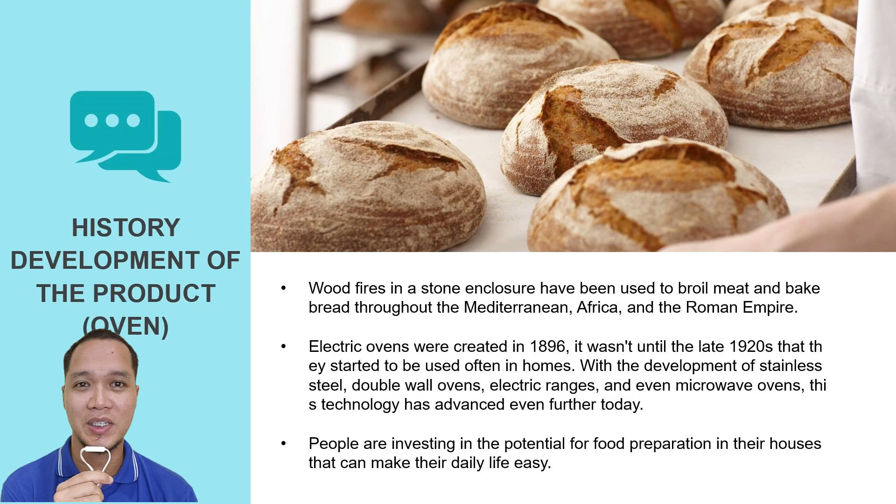Next, in the manufacturing process, there are three methods of production that we need to know: job shop, batch production, and mass production. Ovens are categorized as mass production due to the high demand, with production quantity exceeding 1 million units each year.

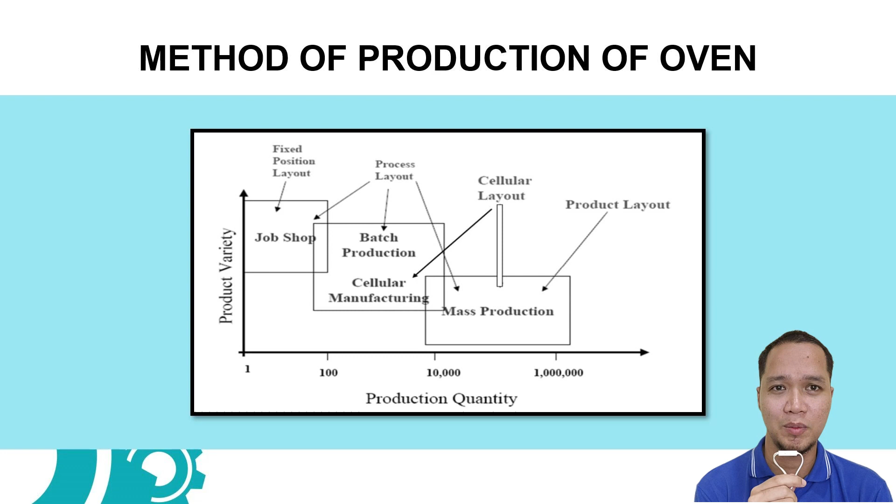In Malaysia alone, as many as 32.7 million people, and about half of the 8.2 million households on average, must have an oven. The picture shown is a component found in the oven.

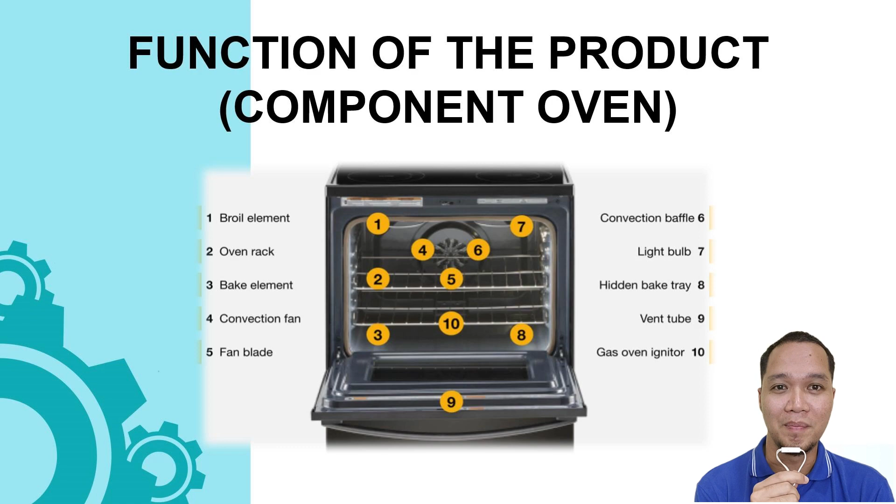Each component has its own function. We can see in this picture there is a broil element, oven rack, bake element, convection fan, fan blade, convection baffle, light bulb, hidden bake tray, vent tube, and gas oven igniter.

For the assumption on the type of manufacturing system related to this oven, we use the cellular layout method for some components such as electronic goods, sensors, and the like, as well as product layout for other components, installing part by part to make a perfect oven.

Estimates also need to be taken into account for each product quantity, and estimated cost that will be produced for a product from the beginning to the market.

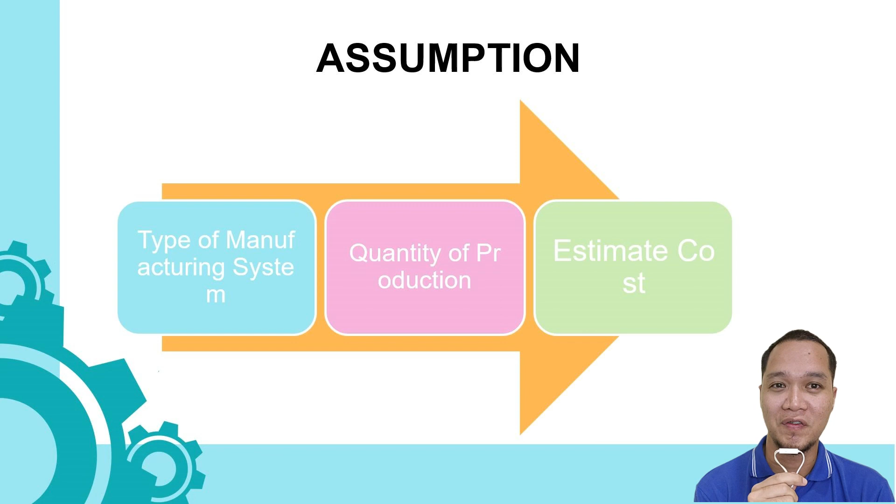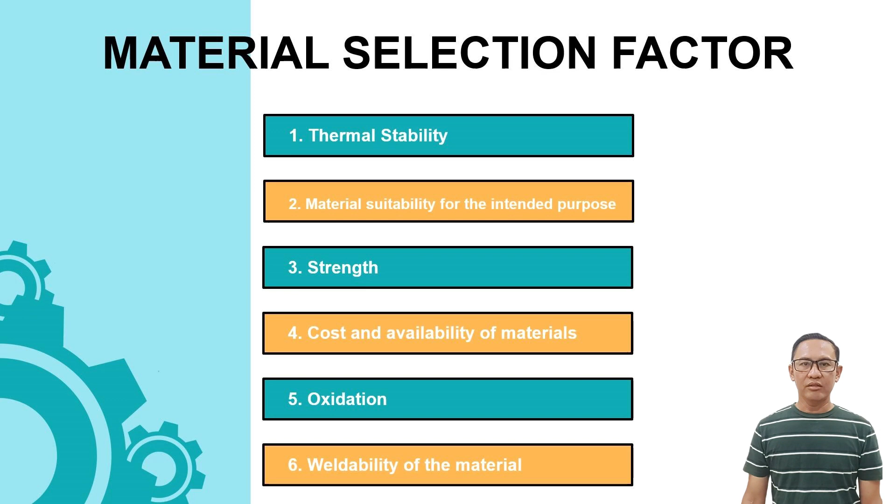Material used in the fabrication of this product is based on several factors of material selection, with criteria including operating temperature. Temperature is often the first, and sometimes the only, data point given upon which one is supposed to base material selection. However, one could not successfully choose material based on temperature alone. Other factors include thermal stability, material suitability for the intended purpose, strength, cost, availability of material, oxidation, and weldability of the material. The selected material and its respective properties are below.

Mild steel: this is an alloy of carbon with carbon content ranging from 0.1% to 0.3%, used for the oven body framework. The enclosure, used for supporting the wire mesh, is also made of mild steel material.

Physical property: mild steel is a good conductor of heat and has a high melting point, around 1650 degrees Celsius. The maximum operating temperature for the oven is around 300 to 350 degrees Celsius, which is far below the melting point of mild steel.

It has a density of 7,900 kg per cubic meter, and due to its lightweight, it can be carried from one place to another when needed. It has a low specific heat capacity, so the material's expansion with respect to increasing temperature is very small.

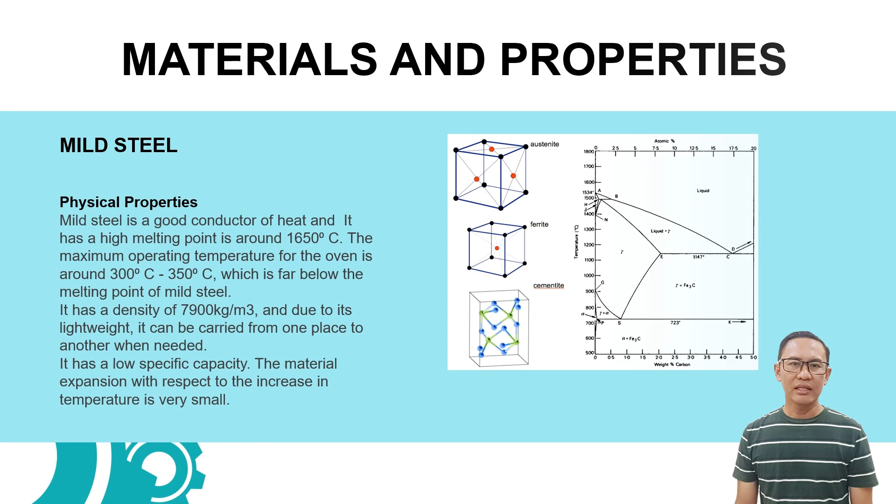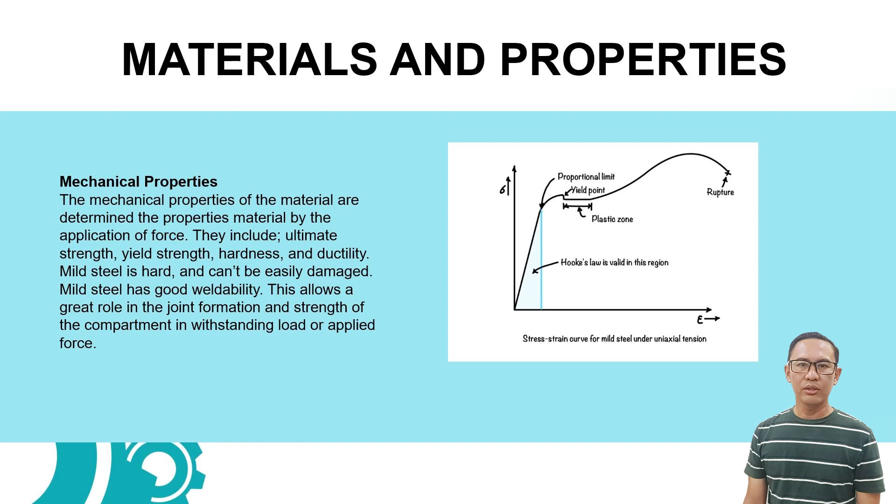Next, mechanical property. The mechanical property for the material is to determine the property of material by the application of force. They include ultimate strength, yield, hardness, and ductility. Mild steel is hard and cannot be easily damaged. Mild steel has good weldability. This allows a great role in the joint formation, and strength of the compartment is to withstand load or applied force.

Okay, I'm Shahira, so I will present the stage of process. For manufacturing system, there is input, process, and output. Process of transformation in manufacturing is one of the most important parts, where this part consists of three elements, which is process, design, and production.

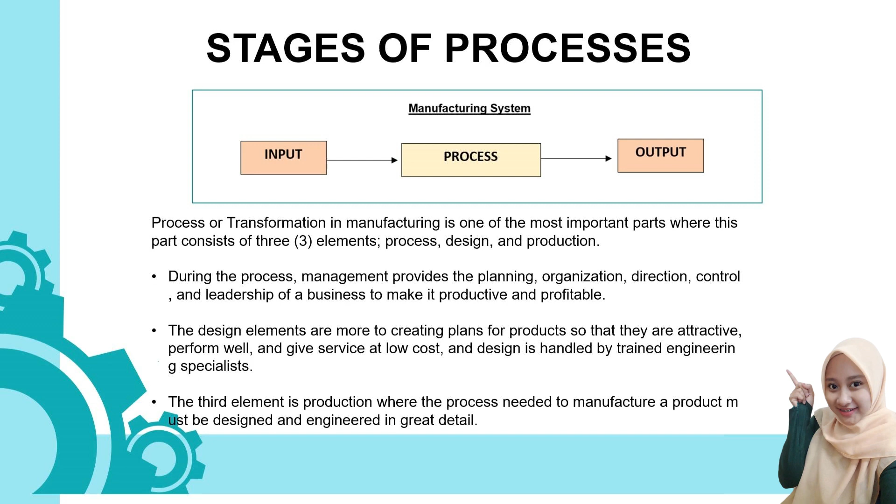During process, management provides the planning, organization, direction, control, and leadership of business to make it productive and profitable. The design element is more to create a plan for the product so that they are attractive, perform well, and give service at low cost, and design is handled by trained engineering specialists. The last element is production, where the process needed to manufacture a product must be designed and engineered in great detail.

Next is method of production comparison. The methods of production are normally known as job production, mass production, and batch production. In the process of producing the product, some research has been made so that manufacturers can produce a quality, low cost, but more profitable product with the implementation of a suitable type of process. So the main features are job, batch, and mass production.

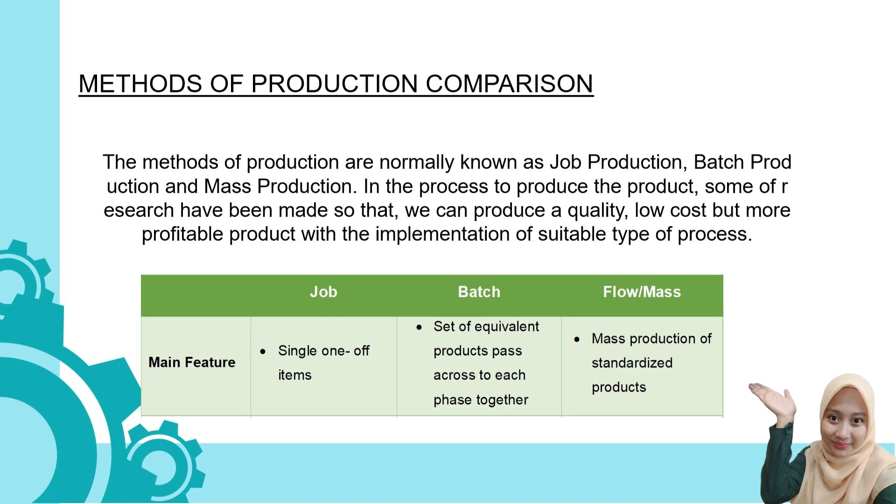The essential requirement for job production is a highly skilled workforce. For batch production, workers and machines should be adjustable to shift to making batches of other products. The last one is mass production, which requires expertise often with high price capital instruments but can be very effective, with high steady demand for standardized products.

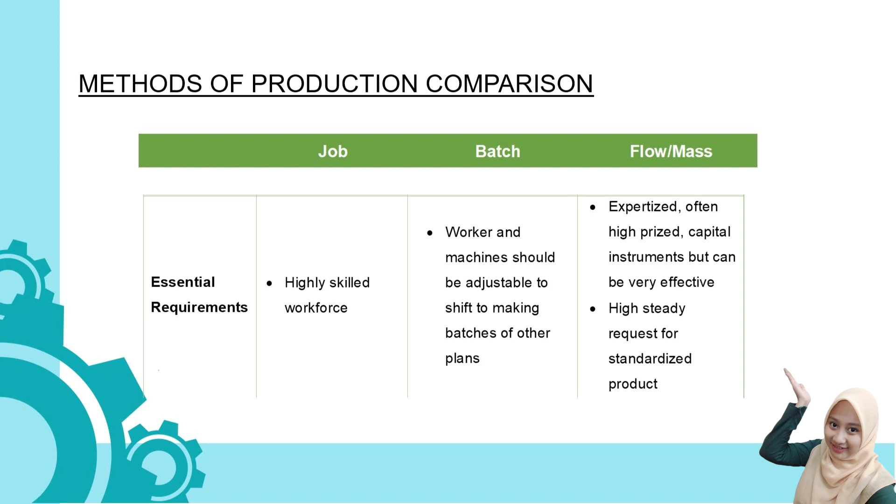The main advantage of job production is it allows acceptance of specialist jobs often with high added value and high level of worker motivation. For batch production, some economies of scale, faster production with lower unit cost than job production, and some flexibility in design of product in each batch. The last one is mass production: low unit cost due to constant working of machines, high labor productivity, and economies of scale.

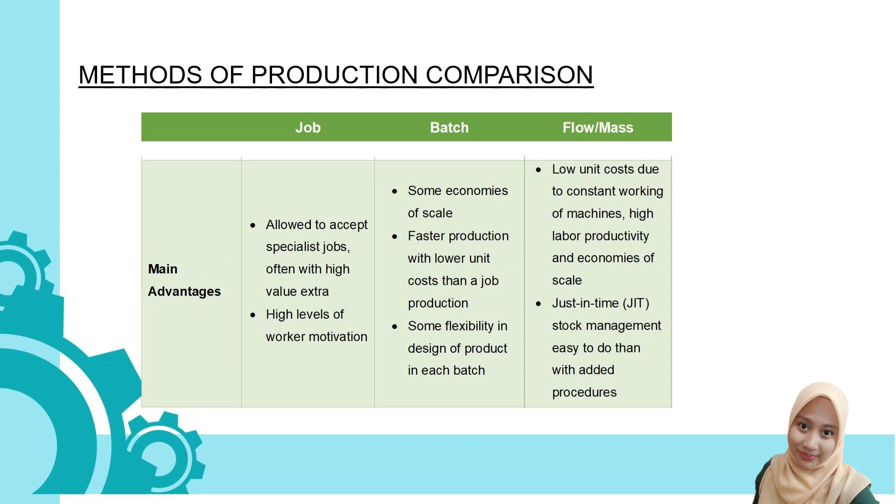The main limitation for job production is high unit production cost, time consuming, and a wide range of tools and equipment needed. For batch production, high ranking of stock at all production phases, and unit cost probably above flow production. The last one, mass production, is unadaptable and very hard and time consuming to change from one type of product to another, expensive to set up flow line machinery, and each section needs to be balanced.

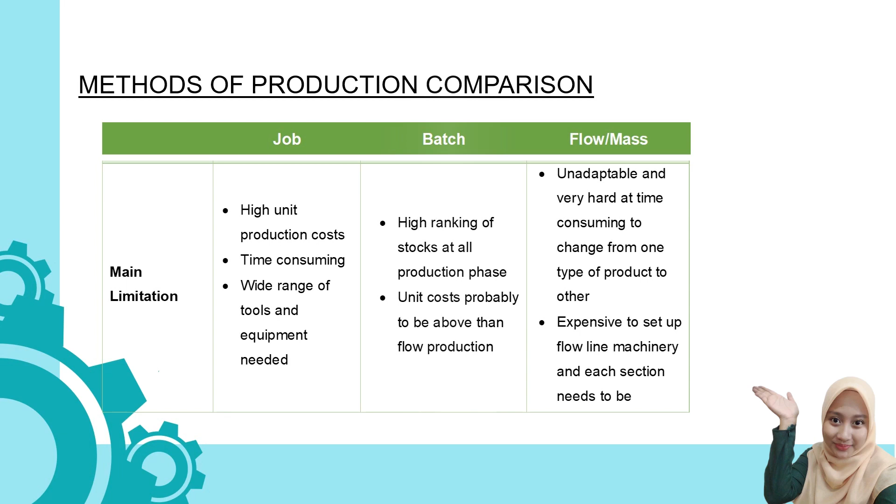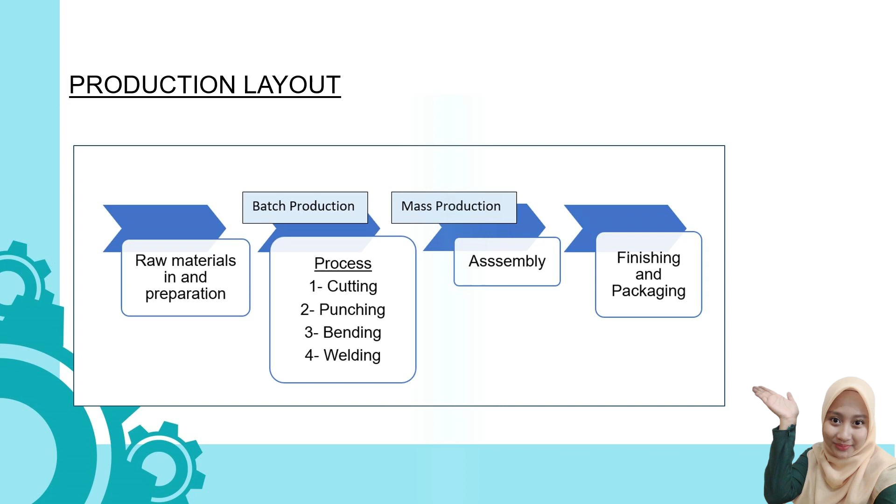So this is the layout for the production. The first is raw material preparation. The second is batch production, which is the process of cutting, punching, bending, and welding. The next step is mass production, which is assembly. The last one is finishing and packaging. So this is the type of process for product manufacture, which is batch production and mass production.

So what is the difference between them? In batch production, the product is made in batches, with every item in the batch going through the series of steps at the same time and in the same order until the entire batch is complete. For mass production, it's the manufacturing of large quantities of standardized products, often using assembly lines or automation technology. Mass production facilitates efficient production of a large number of similar products.

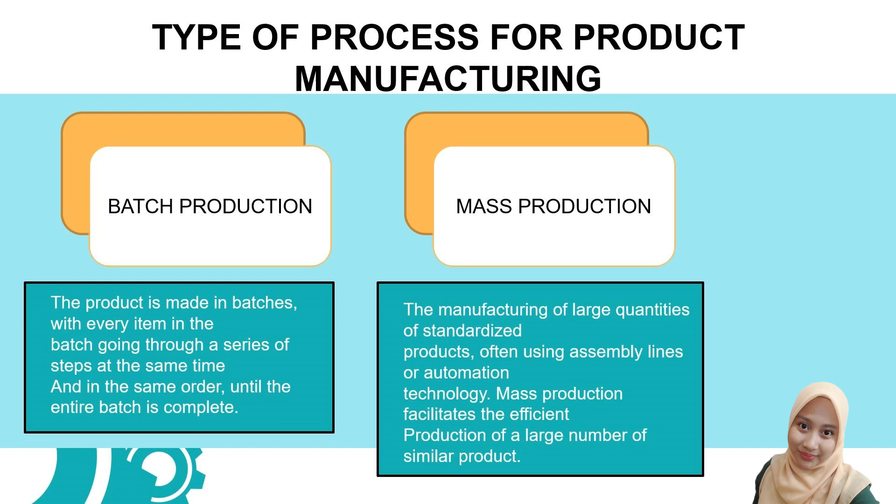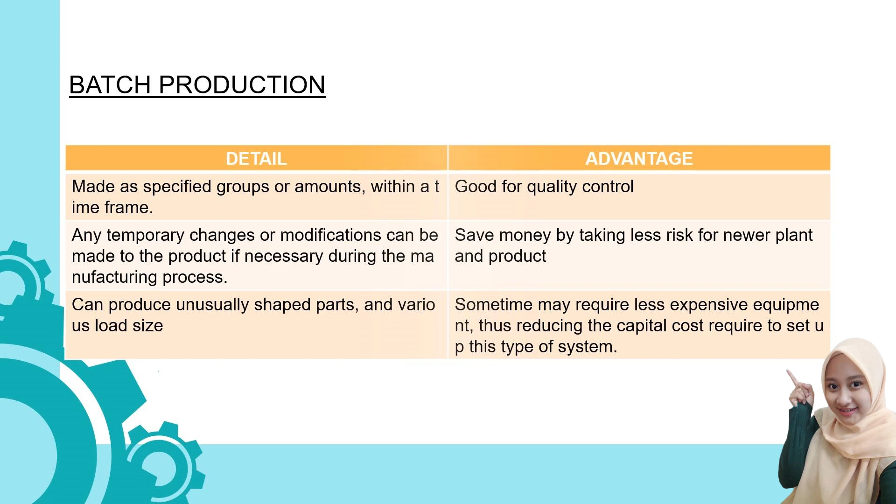So the detail for batch production: it's made as a specified group or amount within a time frame. Any temporary change or modification can be made to the product if necessary during the manufacturing process. It can produce unusually shaped parts and various load sizes. The advantage is good quality control, saves money by taking less risk for newer plant and product, and sometimes may require less expensive equipment, thus reducing the capital cost required to set up this type of system.

The last one is mass production. The detail of mass production is based on two general principles: the division and specialization of human labor, the use of tools, machinery, and other equipment, usually interchangeable parts and products, and the careful division of the total production operation into specialized tasks comprising relatively simple, highly repetitive patterns.

The process does not need to be checked or changed as frequently, and minimal handling or repositioning of the workpiece is needed. It also involves simplification and standardization of component parts to permit large production runs of parts that readily fit to other parts without adjustment, and development and use of specialized machinery, materials, and processes.

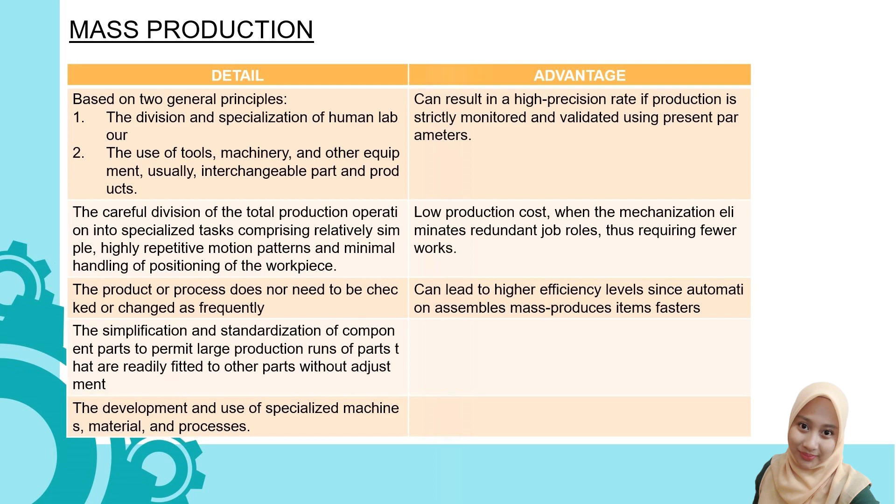The advantage is it can result in a high precision rate if production is strictly monitored, and validated using preset parameters, low production cost when mechanization eliminates redundant job roles thus requiring fewer workers, and can lead to higher efficiency levels since automation assembles mass-produces items faster.

So this is the flow chart from the supplier to raw material, manufacturing for the batch production and mass production, and quality assurance, packaging, storage, and shipping.

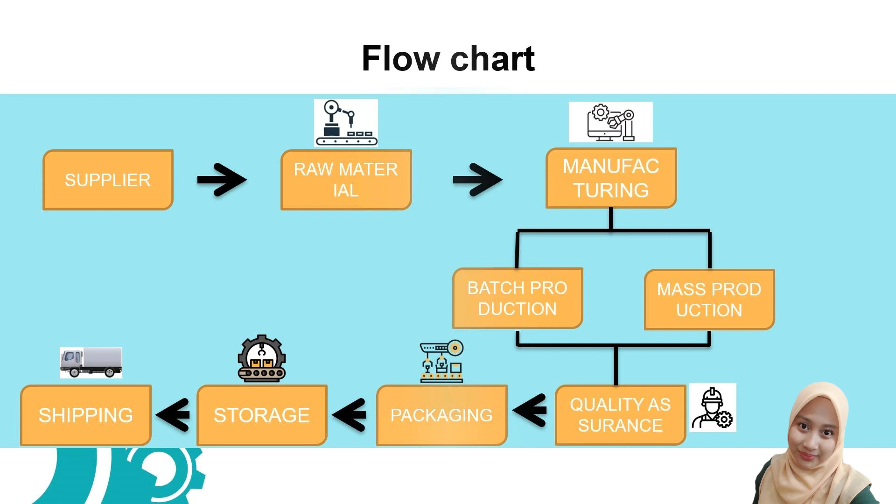Now I will explain regarding machine and equipment used for each process. First process begins with cutting process. In this process, the raw material is cut using a laser cutting machine.

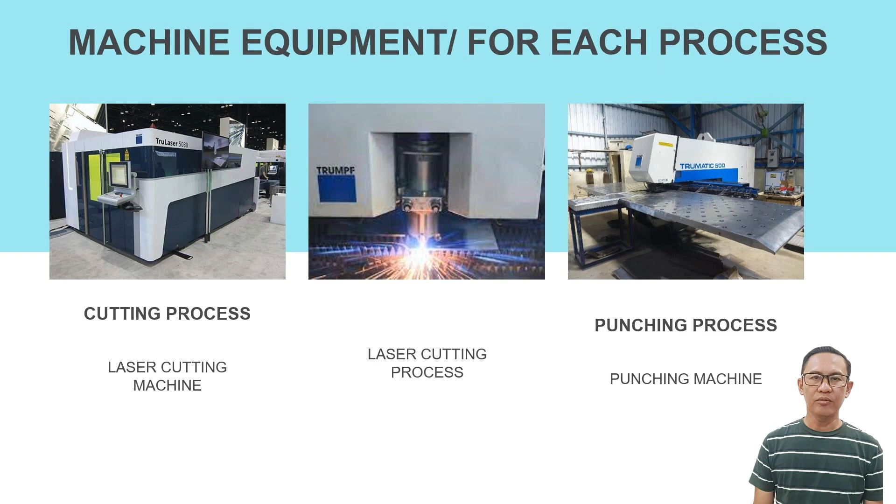Second process is punching process. In this process, the air vent hole is punched with a punching machine to make a hole.

Next process is bending process. The cut piece from the previous process is bent with a bending machine. After that, parts are welded with the TIG welding machine, and the last process is assembly process. Before the finished product, there is test and packaging.

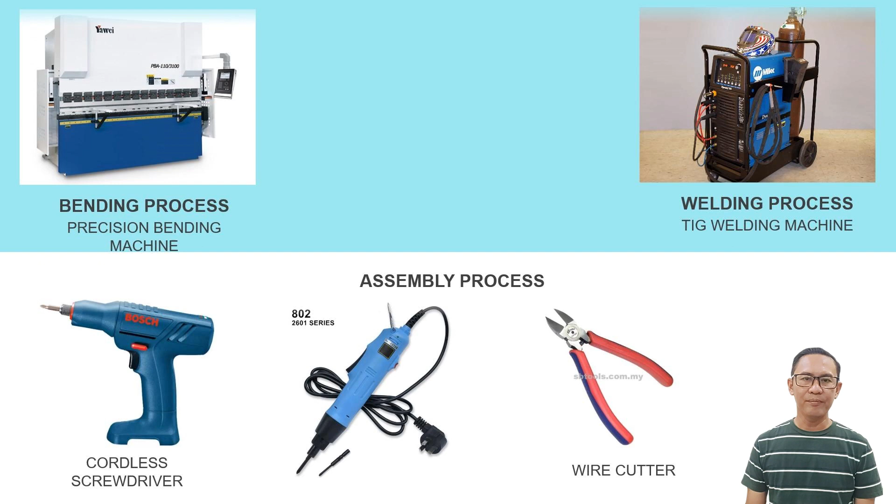Until now, we believe there are so many types of stoves on the supermarket today, but we need to know which one is the best for our kitchens and to consider the most important thing, which is their impact on the environment. Therefore, our company has decided to manufacture an eco-friendly oven for household consumers.

Other than that, to stand out amongst the competition in the manufacturing field, we practice green manufacturing production process as shown in the figure. As you can see, this is the green manufacturing cycle. It starts with design, procurement, manufacturing, packaging, customer use to end-of-life, remanufacture, and design again.

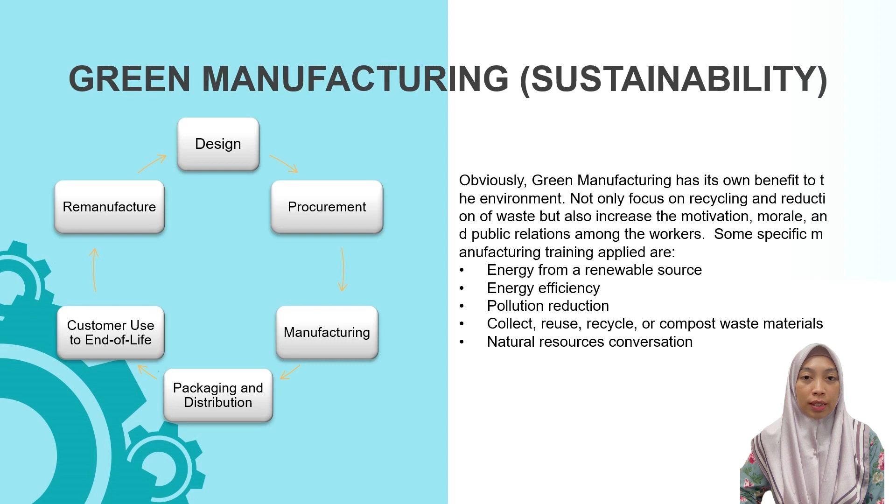Obviously, green manufacturing has its own benefit to the environment. Some specific manufacturing production applied are energy from renewable sources, energy efficiency, pollution reduction, collect, reuse, recycle waste materials, and natural resource conservation. Sustainable manufacturing design includes energy saving, reliability, and producing less waste. When possible, the best environmental product should be processed with fewer energy and can operate with optimal levels of power.

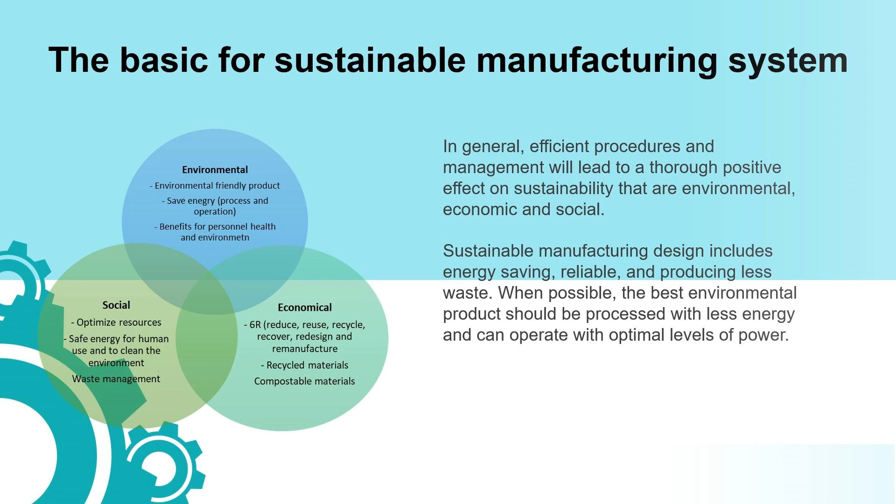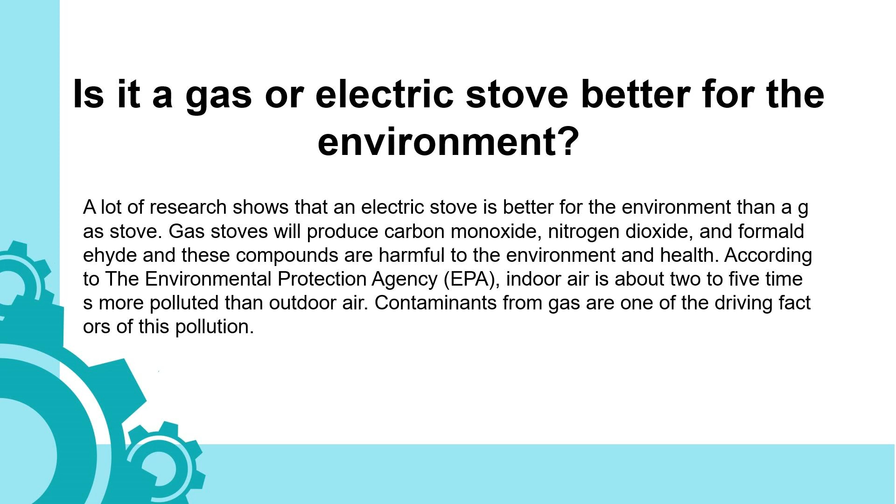So now, is gas or electric better for our environment? A lot of research shows that an electric stove is better for the environment than a gas stove. This is because gas stoves produce carbon monoxide, nitrogen dioxide, and formaldehyde, and these compounds are harmful to the environment and health. According to the Environment Protection Agency (EPA), indoor air is about 2 to 5 times more polluted than outdoor air. Contaminants from gas are one of the driving factors of this pollution.

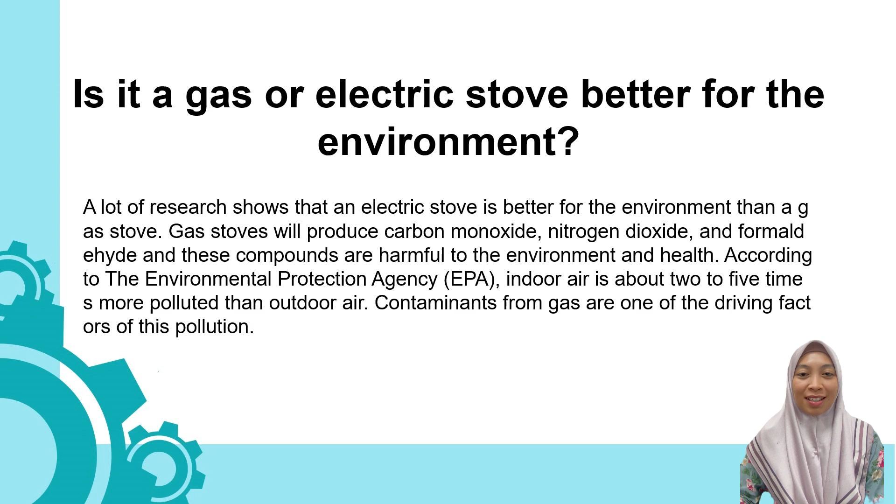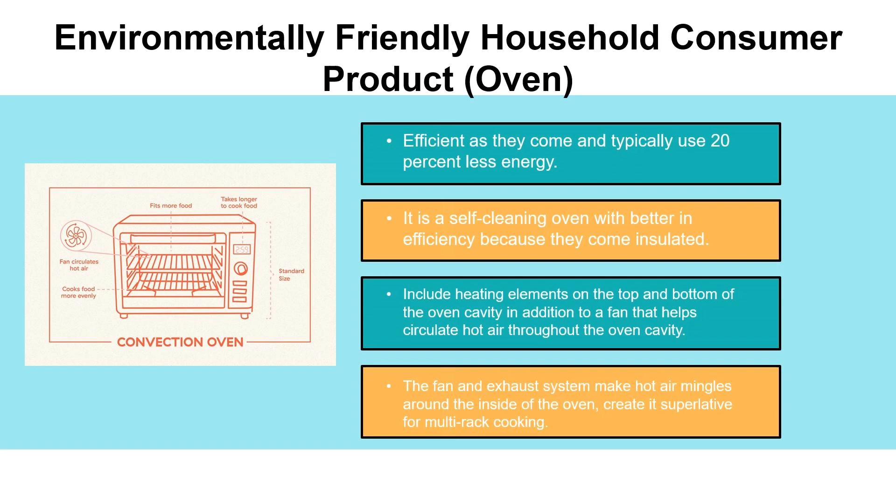Furthermore, convection ovens have heating elements on the top and bottom of the oven cavity, in addition to a fan that helps circulate hot air throughout the oven cavity. Last but not least, in order to keep good condition, there are strategies implemented which are related to 6R.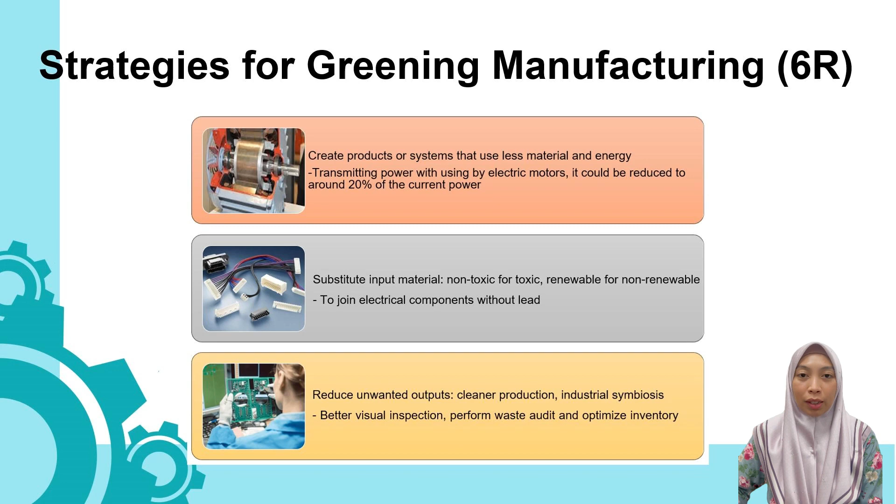Firstly, we create product or system that uses less material and energy. Secondly, we substitute input materials, non-toxic for toxic, renewable for non-renewable. Next, we reduce unwanted outputs. We also convert outputs to inputs.

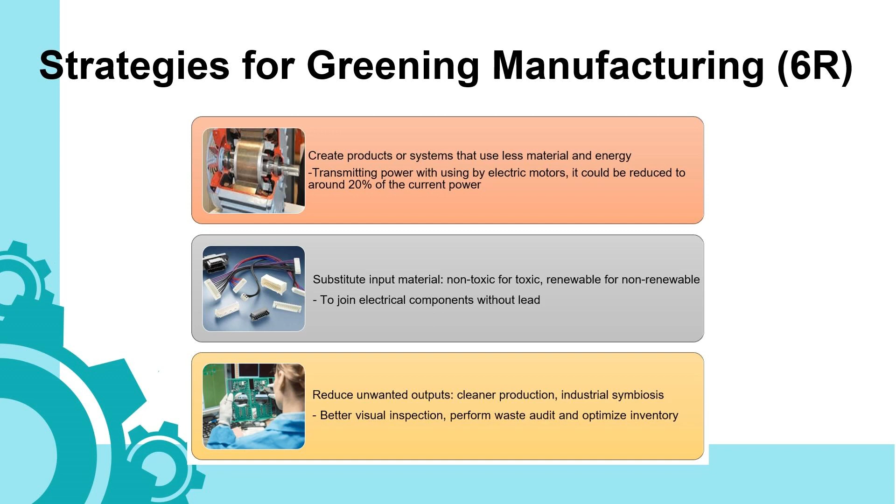We use packaging that can always be recycled and reused. Lastly, we change structures of ownership and production, product, service system, and supply chain structure. And that's all from me.

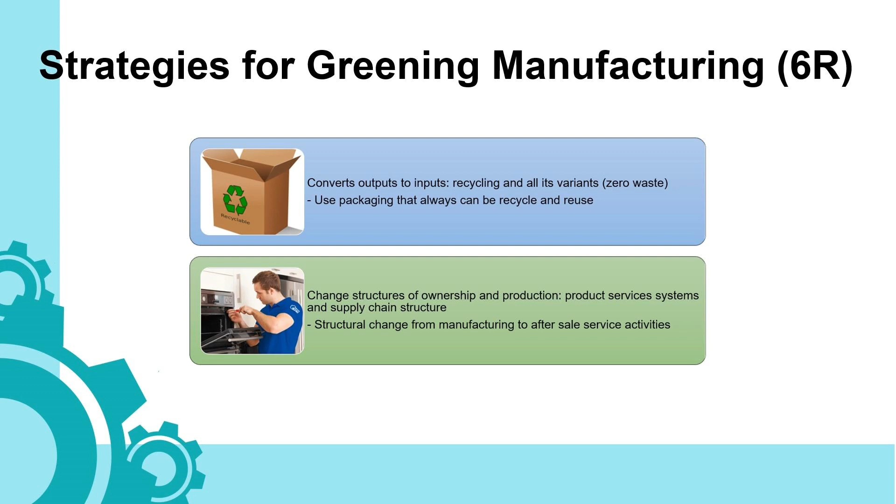This project has provided a comprehensive overview of the development, production methods, and function of ovens. The history of the oven traces back to ancient times, with advancement in technology leading to the introduction of the electric oven in the late 1920s. Today, ovens have evolved with features such as stainless steel construction, double wall design, and microwave capabilities, catering to the diverse needs of modern households.

The manufacturing process of ovens falls under mass production, driven by the high demand for these appliances. In Malaysia alone, where there are approximately 32.7 million people and 8.2 million households, ovens are a common household item. Detailed specification of the final product focuses on material selection, component analysis, and dimensional aspects of the oven. The material selection process considers factors such as thermal stability, suitability for the intended purpose, strength, cost, availability, oxidation resistance, weldability, and operating temperature.

By implementing these 6R strategies, companies can promote green manufacturing and contribute to a more sustainable future. The use of renewable energy, recycling, waste reduction, and responsible practices can help minimize environmental impact and create a healthier and more sustainable manufacturing industry. Thank you.